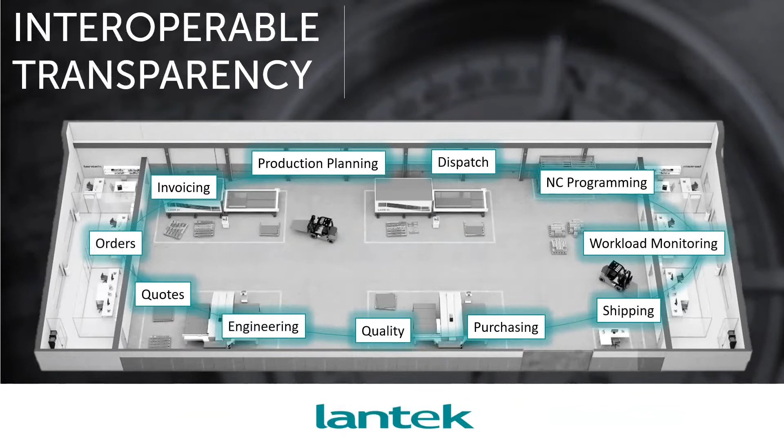All right, so this leads us into our Lantek Expert Punch demo. So we know that tooling a part can be very time consuming. You know what tool you want to use, but the question is, does the software know which tool you'd like? Also, the punch sequencing can be a bit of a burden. So how can we get the direction you want in a less time consuming way? By using Lantek, you can create punch macros to help teach the software what tool or tools you want to use for a specific contour. And you can also make tooling common shapes a lot quicker.

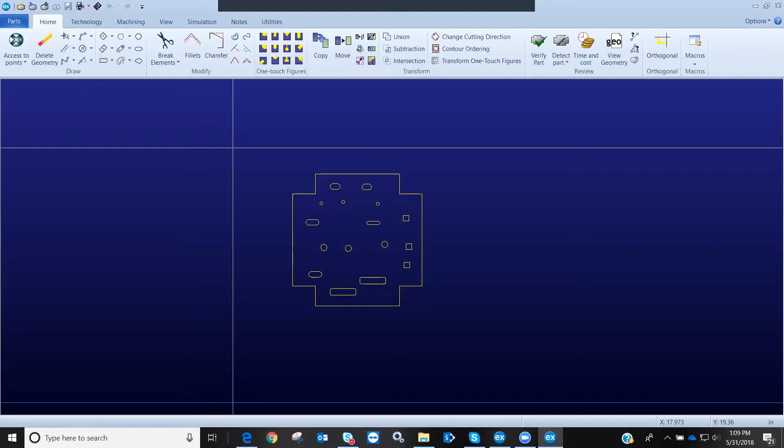And then I'm going to open that in what we call our drawing module, but it's also our machining module as well. So we open up the drawing module, and this would be the geometry we're going to work with for this particular part.

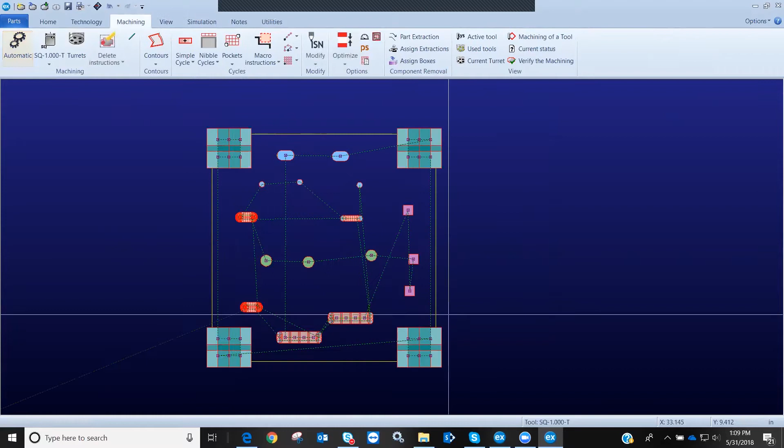So at this point, I'm going to go to the machining tab and click on automatic for automatic machining. Here we have some different options and configuration settings. I'll go through a few of them, but to start with, I'm just going to tell the system that it can use all the punches in our inventory. Select OK.

So we can see that the system can recognize if we have an oblong shape and a tool that matches that, or rounds; it knows to tool those directly. If we have a shape that cannot be done with one punch, the system will try to use multiple punches. You see we're using a round on the radiuses here, and then a square in the middle on this one.

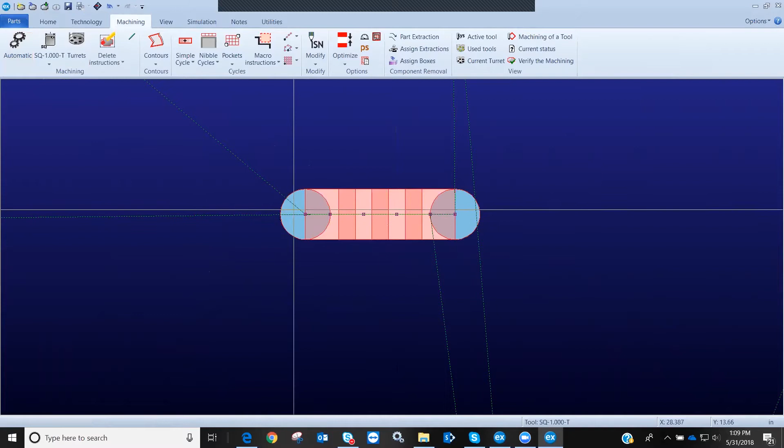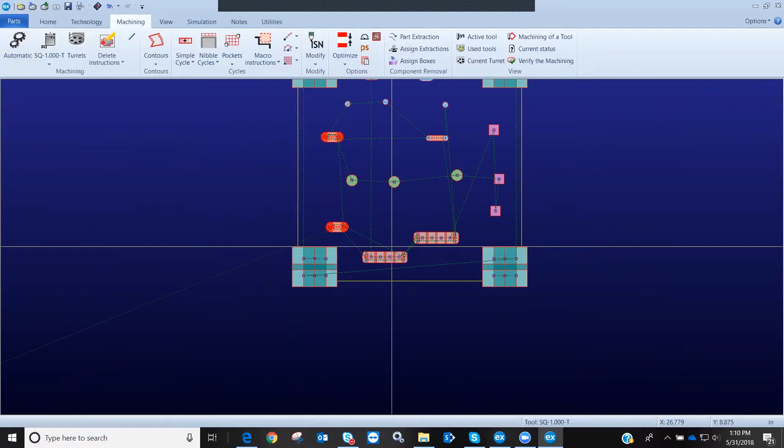On this particular contour, we're nibbling around here and using a square tool in here to finish that out. Down here on this contour, we're using a couple rounds and squares to do this. So the system will kind of do what it can to try and pick a tool. It usually tries to pick the biggest tool it can.

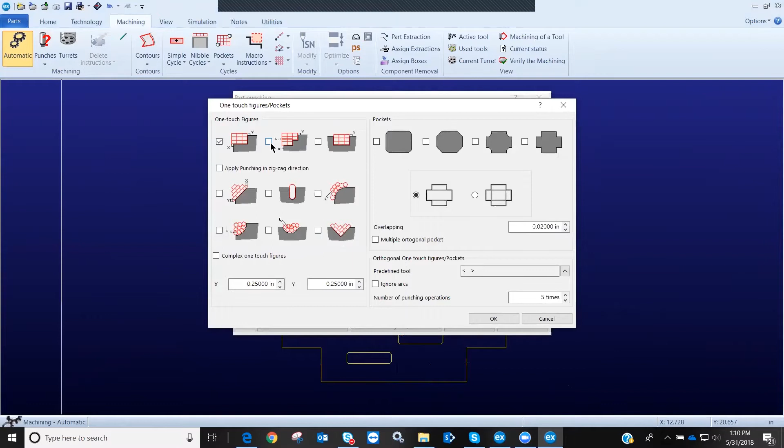And then on the outside corners, you'll notice that it destroyed the corner, and it also went outside the part. The reason it did that is because of an option we have here we call one-touch figures. This just gives you the option to tell the software that you want to destroy a corner. If we don't have this checked, I'll uncheck this.

What it does is it treats each line individually. The idea is the system will try to find the longest tool it has in order to punch that line with that tool. So if we don't want to destroy a corner, we don't have to. We can just let the system treat each line individually.

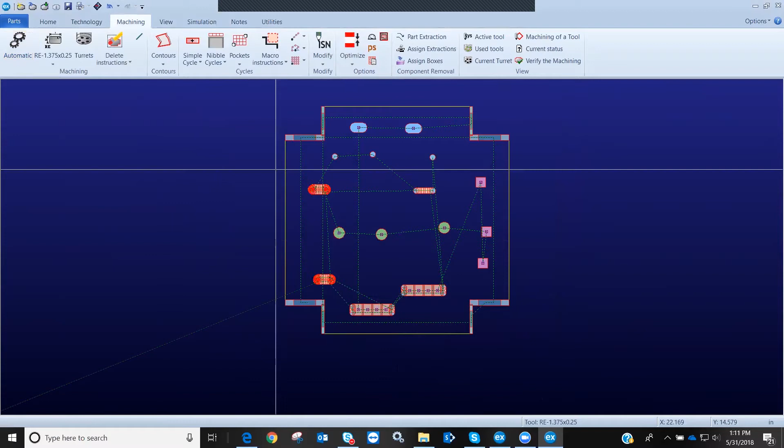So we have those options in the machining settings, and every time you machine, that window can be prompted to come up, and you can choose different options in there.

So before I machine the part or finish machining, the other thing that we can talk about is microjoints. And under our technology tab here, I can apply microjoints to this part. And if we're going to apply microjoints that are going to affect how the tooling is used, then we need to do those first.

So for example, if I wanted to put a micro joint on either side of the square corners here in order to create a kind of a shaker tab, then we have a few different ways to do that. I can do just micro joint on one corner, micro joint on a contour, on 2 corners, on 4 corners, or I can make a whole contour micro joint. But since I know that I want to put it on both sides of this line and both sides of this line, I'm going to choose my micro joint on corners.

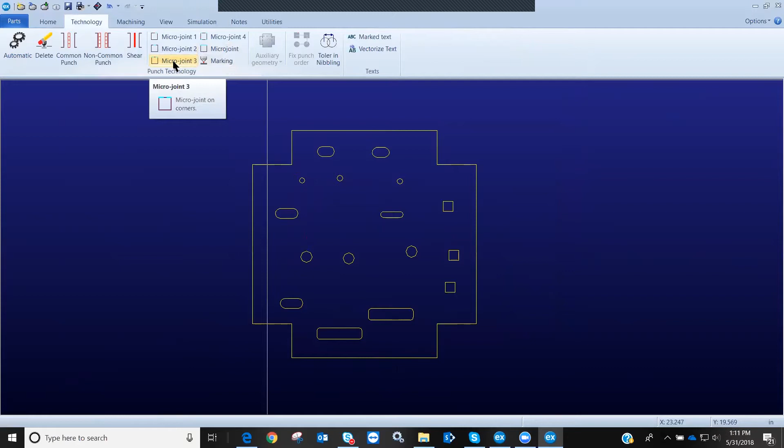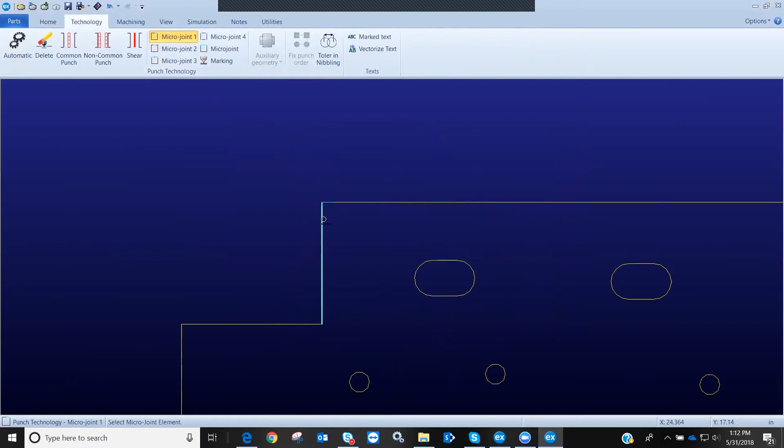I just choose the line, and I'm going to make this a little bigger than what would be normal just so that we can see it. So I select OK, and we can see that the little light blue line is just letting us know, along with the dots there, that it put it on there, and I'm going to choose there. And then if I wanted to put a micro joint just on the end of this line here, I'm going to choose micro joint just on a corner, and whichever side I choose closest to, that's the side it's going to put that on. So I will put one there and there and there and over here.

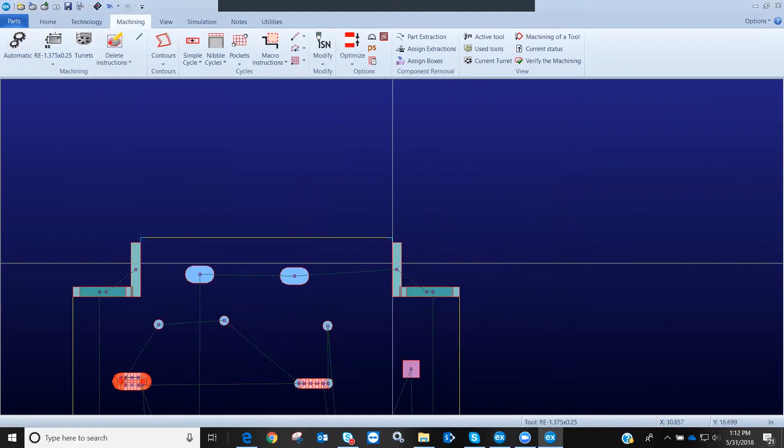Okay. So now when I machine the outside of the part, or machine the part totally, then the system recognizes that there is a micro joint there, so it will stop that punch short so as not to violate the micro joint. Then at this point, we need to decide, when we go to nesting to nest this part, do we want it to be common nested, where we take one particular size punch, and as we go down between 2 parts, it just takes the 1 row of hits, or a non-common?

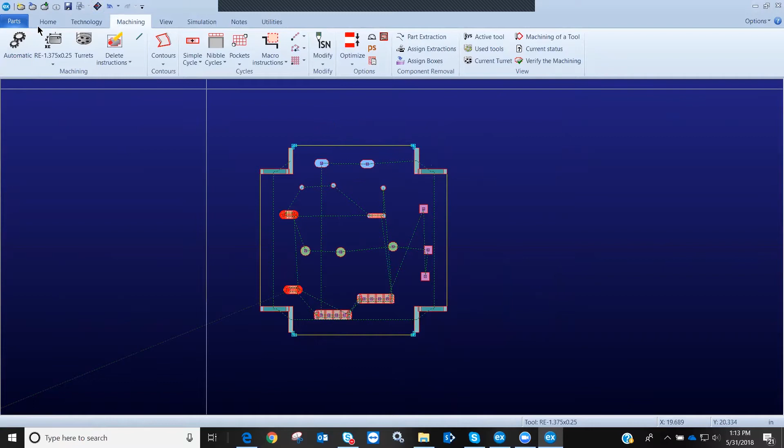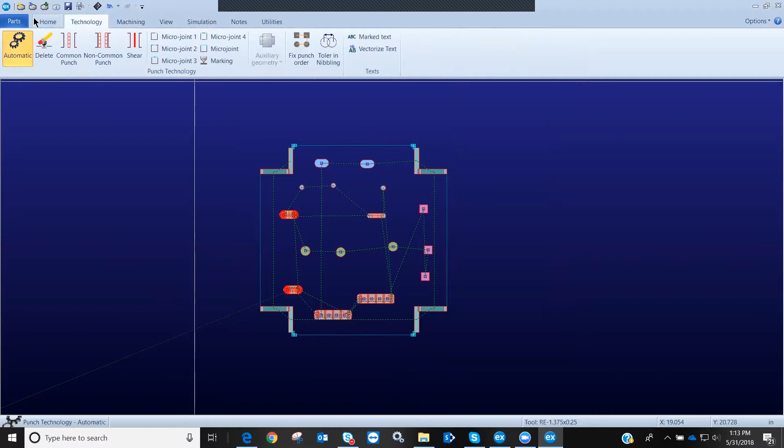So I'm going to go back to technology. I'm going to click on automatic, and I'm going to tell it I want to do a common punch between the number ones, and the number ones are just the true horizontal and true vertical lines of the part. And I'll say OK, and the system just changes those colors. It just lets us know that it has applied that technology. And then I will save the part.

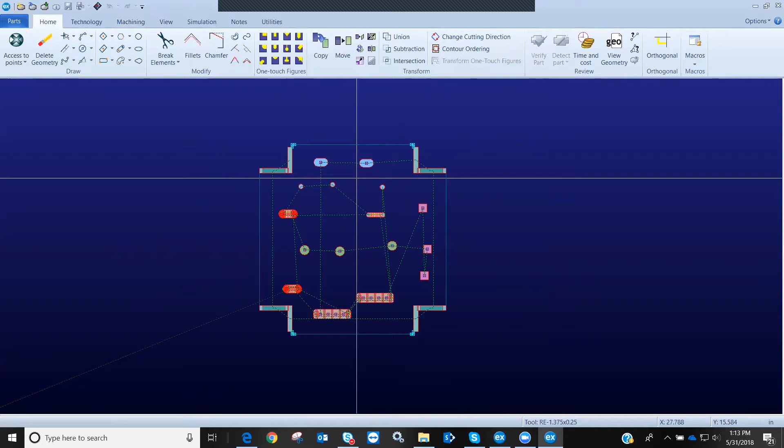Now, I have not punched the very outside of the part. You can at the drawing level, but a lot of times we recommend you wait till you go to nesting to apply those. That way, if you're mixing parts, then you can have a common tool to punch the outside. So I'm going to go ahead and click on our nesting module, and I'm going to change my quantity here, a few parts, and I'll do a 1 sheet nest on a 4x4 sheet.

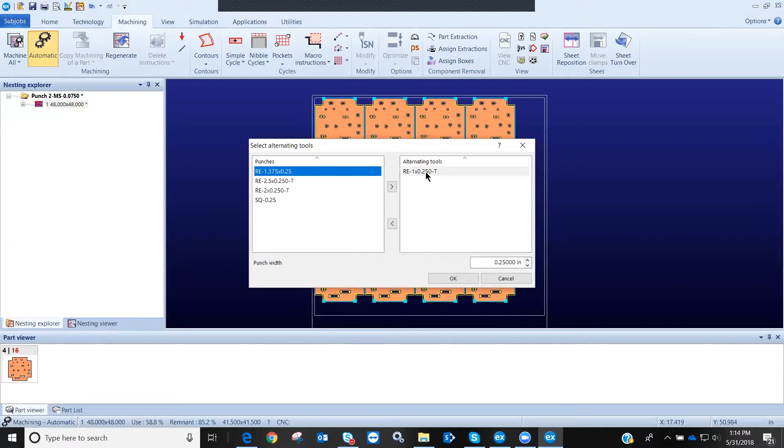So at this point, it's done the nesting, and the part has already been machined at the part level. But what we do now is we machine it here, and it keeps what we did at the part level, and now we're adding the outside tool. So I have a horizontal tool for the outside. This is just letting me choose an alternate tool. So if the system can't use the main tool, it has some alternate tools, maybe shorter tools that it could use for the horizontal, and then same for the vertical.

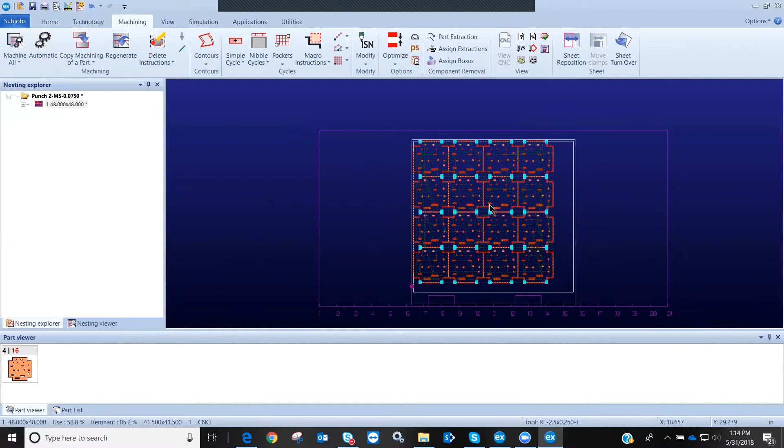And then when it gets to the end, this just shows you your turret layout, what tool is in each station, and whether that particular station is being used or not. And I can select OK, and you can see that the system has gone in and tooled all the part. It's added the outside punching. Up here where the micro joints are, it honored those micro joints. And through settings in the software, we're going to wait to do the outside hits last.

If we wanted to change some order in regard to the tools, if we wanted to put the tools in order manually, for example, by default, the system is going to go normally from the smallest tool to the biggest. You can also set it up to do it by turret station. So if you just wanted to start with station 1 and go around the turret, you could have it do that as well.

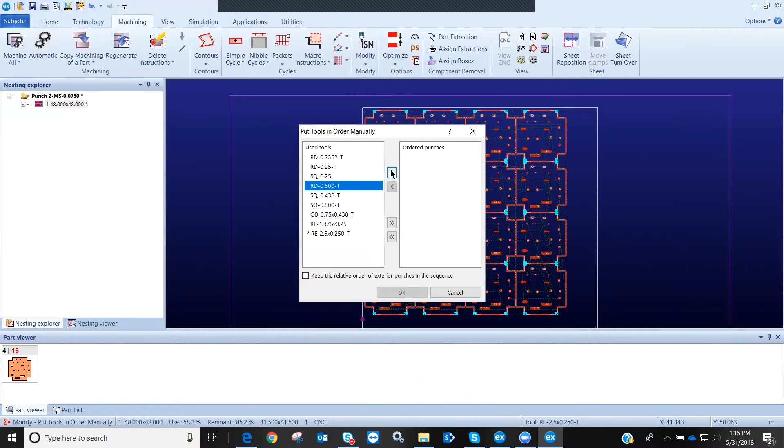But if you wanted to change some order that it is doing the hits in, I can choose manually the order that I want to do it in up to whatever point. And then after that, if I just want to take the rest that's there, I can move everything else over, just say OK, and the system will just automatically go in and redo that. And as far as the outside hits go, the way I have it set up right now is it's going to do the vertical hits of the outside and then do the horizontal last. So I'll just very quickly in the simulation, just going to back up a little bit here.

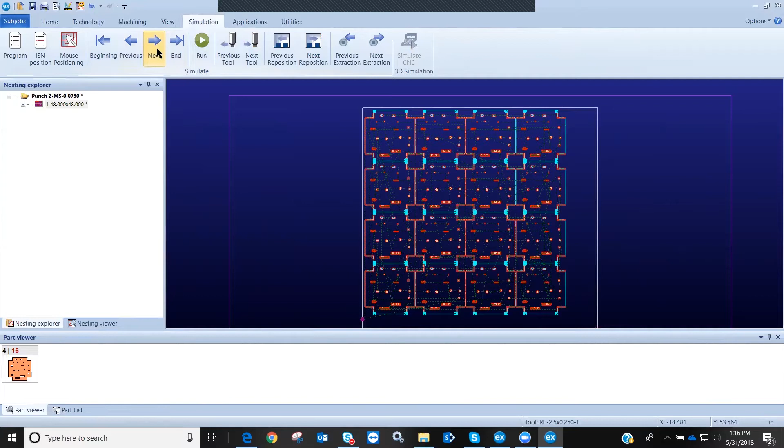So you can see right here, it's going to start doing the vertical hit on the outside. All the inside hits are done, and it's going to come down this way and then go back up and around. And then when it gets done down here at the bottom over here, it will go back to the top and then go from the top down and work itself toward the clamps.

So there are configuration settings that are telling the system to do this. Those can be changed with different options we have, but that's kind of the most basic. You'll also see down here where you can see the clamps, and if you have a machine that has different clamp zones depending on the station size, as you simulate the punching here, the clamp zones will change to show whether you're close to a particular tool or not.

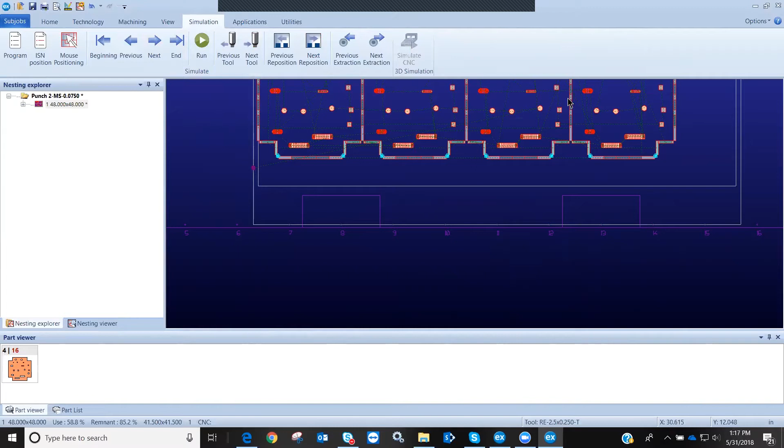The system will also do automatic repositioning. If you do want to nest down in the clamp zones, it will try to reposition to do the part as best as it can, but you also have the ability to do manual repositioning if you want to as well. So that's kind of a quick A to Z: you bring in geometry of a part, you tool it, you go to nesting, you finish the machining there with the outside, and you get your nest and you save it. So I'm going to go bring in another part here.

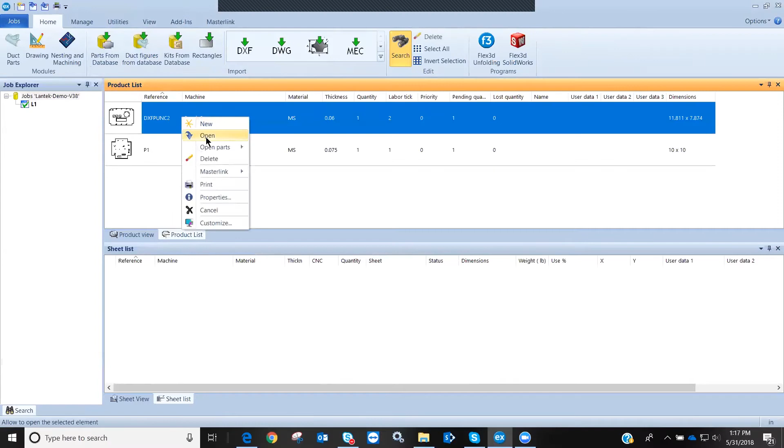This particular part has some different shape geometry on it. You'll see we have this particular shape here. It's not a standard shape, so we couldn't just create this by going to manage tools. So we're going to have to create this shape from the geometry. And I'll show you first of all, if we just tool this the way it is, the system will try and tool it, but if you purchase a tool to do this hit, it won't use that tool until we've created it.

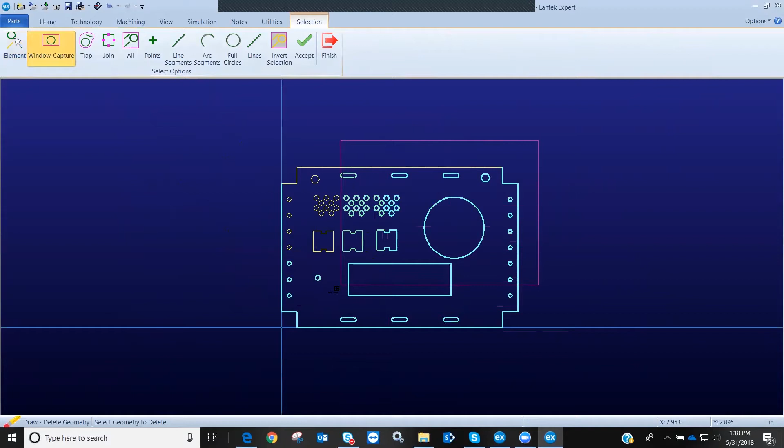So to create a special tool, I only want the geometry that makes up that tool. So in this particular case, I'm going to delete everything else. Now, if you get a special tool from a tool manufacturer, normally they'll send you a DXF file of that tool, and you can just import that DXF file right into Lantek, and we just need the part geometry, or you can draw it inside of Lantek as well. So I've got my part geometry here.

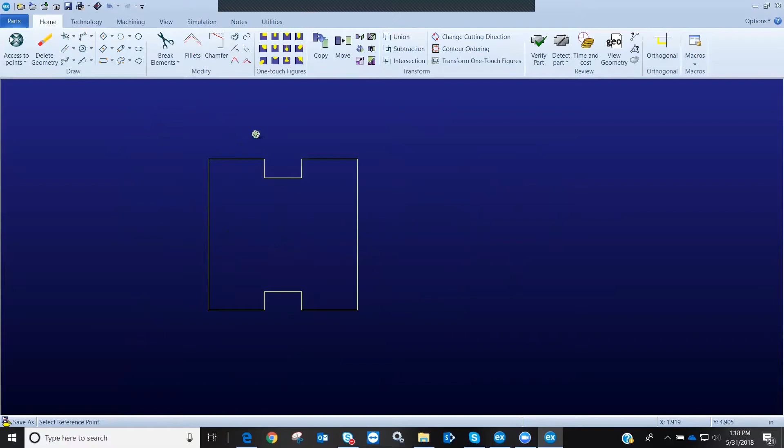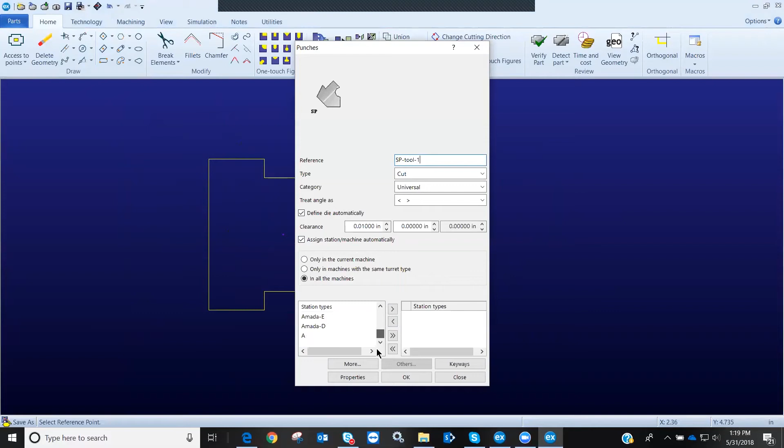I'm just going to go to the parts tab here and form tools, save as, and then I'm going to choose the center of our contour. The center point is going to represent where the center point of the tool would be. So again, normally when you order a tool, you're going to know that, or you'll get it with the drawing of the tool. So I'm going to choose the center and just give this a name. You can call it whatever you want, whether it's a cut or form type, whether you want the die clearance, and the station type that it's going to be in. And it has created that form tool.

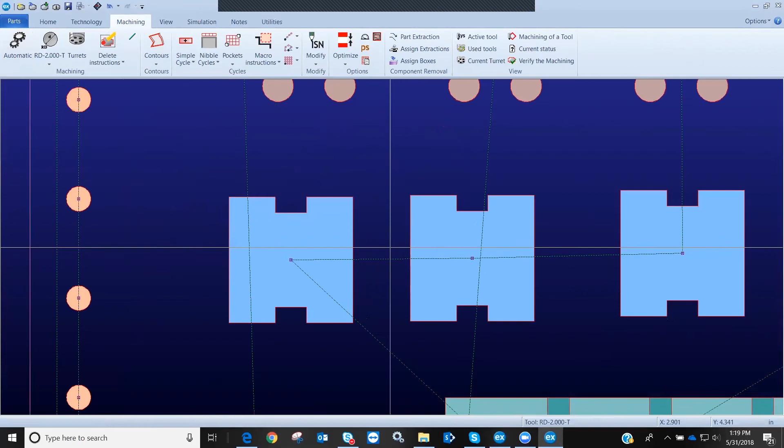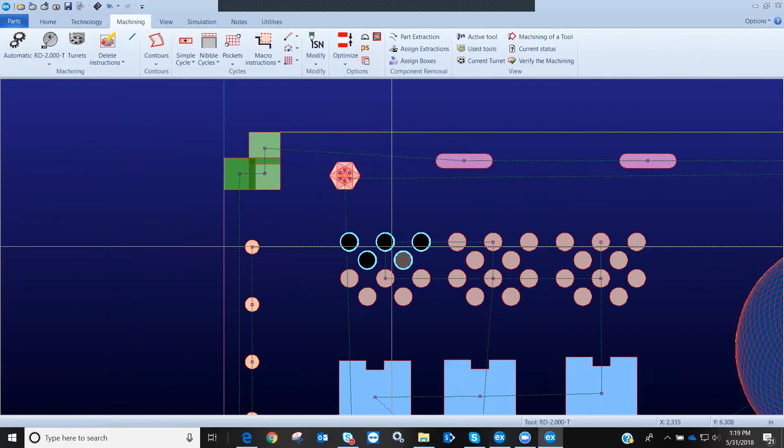So now I'm going to reopen our part that has that particular geometry in there. And now when I automatically machine this, the system recognizes that it has a tool for that geometry, and it will go ahead and automatically use that tool. Now you'll notice in our group of hits here, I have already created a gang type tool, where this particular tool will make 5 hits with the one tool. And this got created just the same way as the special shape down here.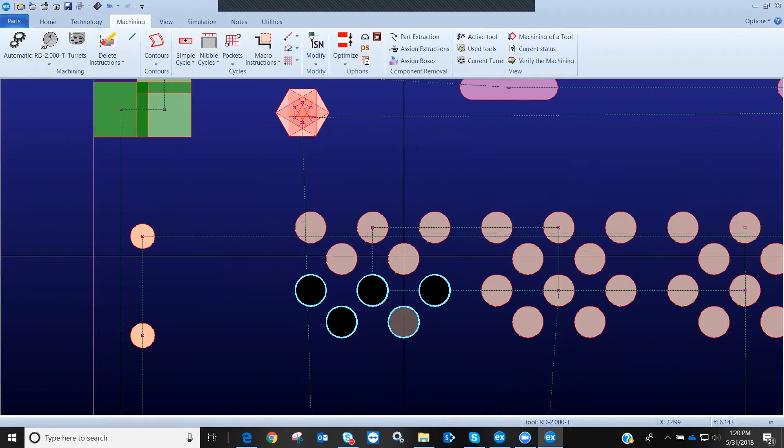We just had the geometry of the 5 holes, and we created it as a special tool and gave it the center point reference. And then when you have a part that has that same group of hits with the exact same spacing, the system will recognize that, and it will use that gang punch to punch those holes. So if I right click on this, you can see that it's selecting that particular tool. And then we also have a big round here that it's doing some nibbling on, and a big cutout here that it's done some punches on.

But what if the system didn't do something I like, or I don't like the way it punched something, or I just want to change what it did? We have some ways to do some manual punching. So I'm just going to delete what we have here. And so for example, on this circle, if I wanted to maybe punch the middle of the circle out with a square tool and then do the outside with a round tool, I have the option of doing that in our macro instructions here.

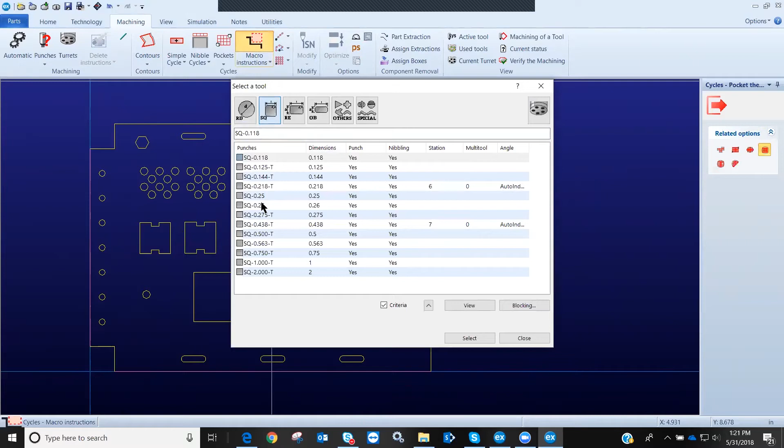I can tell the system to pocket the square of an inscribed circle. And when I choose this, it's going to tell me that I have no active tool yet. So I just need to choose the square tool that I want to use to do this with. So I'll choose this 275 square. Now, as I move over near the circle, as soon as I get near that circle, the system will recognize that it is a circle, and it will go ahead and add the group of hits for that square tool.

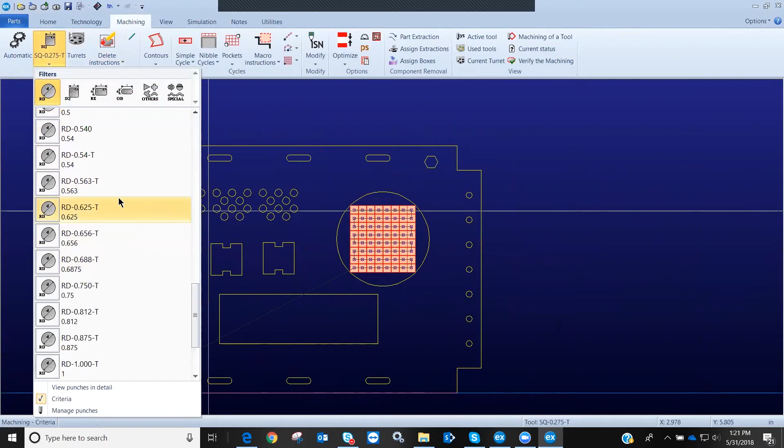Now, over here, I can choose a round tool that I want to use to do the outside or finish the circle. I'll click on my 625 round here, and I'll go now to our nibble cycles and choose by geometry. And what this is doing is just as soon as I get near a geometry, depending on whether I'm on the inside or outside, it will tool that geometry with that tool. So as I get there, I just select that, and it's now done the square hits and the round hits.

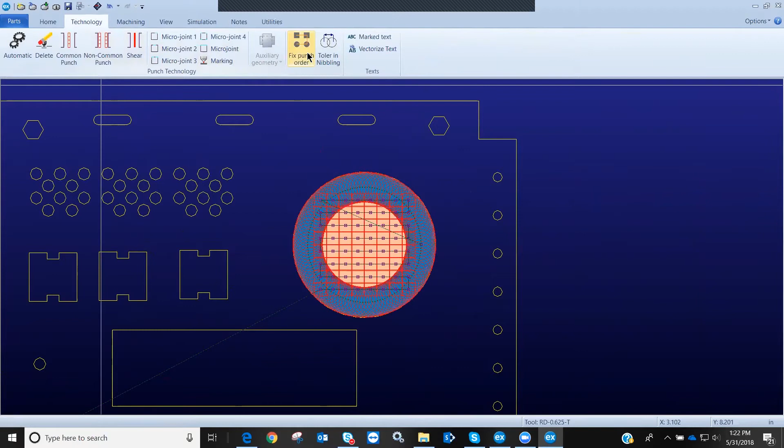Now, at this point, we want to make sure that if it's going to use that combination of tools, that maybe it always does the square tool first, then the round. When we go to nesting and nest it, we could choose the sequencing there, or under our technology tab here, under fix punch order, we can tell the system, I want to do the square first, then the round. And when I select OK, for this part, when we save this part, every time we bring this part into nesting and nest it, it's going to keep that sequence of those two tools for us automatically.

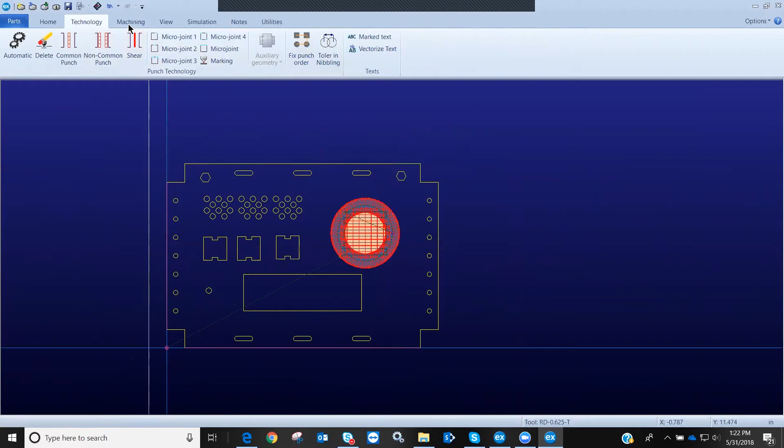And then for our rectangle down here, if we want, instead of destroying this rectangle, maybe we want to punch this with a rectangle tool around and leave some tabs in it, we can do that as well. Through our Macro Instructions tab here, we have the ability to do a rectangular hole with micro joints on 2 sides or 4 sides, or we can do one where we actually have to put in a stop or trap. We'll just choose maybe 2 micro joints here.

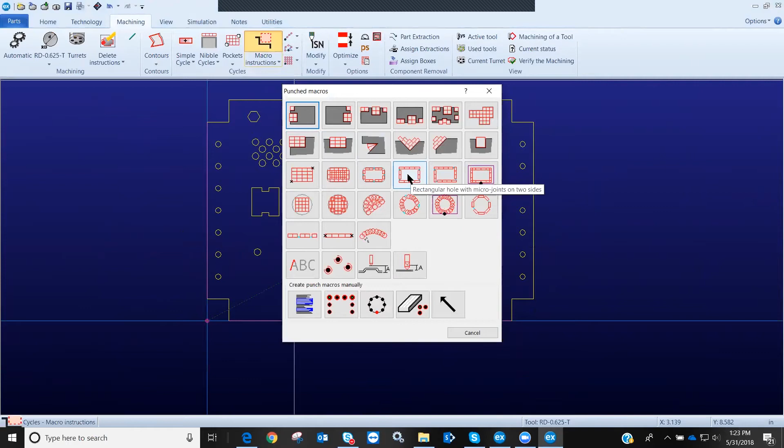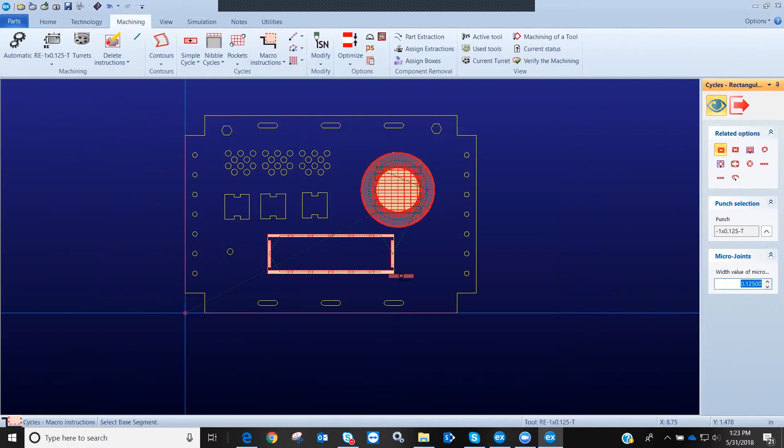Now I haven't chosen a tool yet, so when I click on this, it's going to tell me that I need to choose the rectangle tool that I want to use. I'll choose a 1/8 inch here. And now as I get near that particular cutout, it will choose that tool. And over here on the right side, I can put in the width of the micro joint. So I'm going to make this bigger just so that we can see it. So I select that, and now you can see it's added the micro joints along with the hits to cut that out.

And then after we do whatever manual machining we want to do, we can finish with automatic machining. And you'll notice on the corners again, we didn't have it set up to destroy the corner, so it just punched the edges with the biggest tool that it found. If we wanted it to destroy those, I don't want to delete all the machining. So we have undo buttons here. So I just did an undo of what I had just done, and I could go back to the one-touch figures. I can choose to destroy the corner if I want, and the system will destroy the corners.

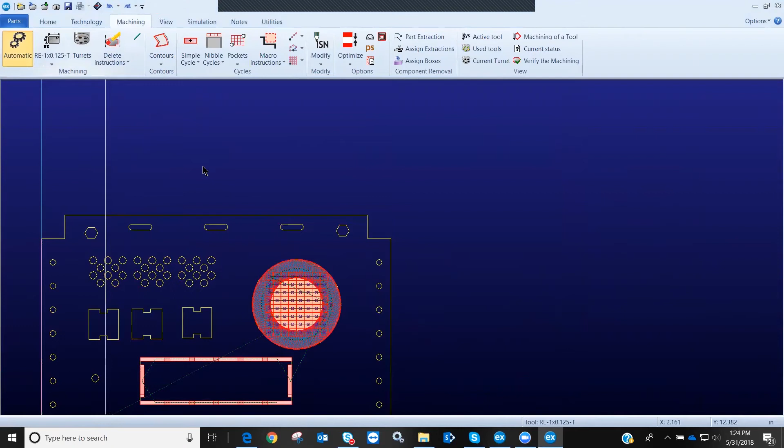Now the reason it's overlapping here is because I have a setting here in our one-touch figures. I'm telling it to by a 1/4 inch. That 1/4 inch just matches the width of my parting tool. But if you put 0 in there, then it won't overlap at all. So you can see it's staying to the edge. So just some parameters that kind of help the system know exactly what it is that you're wanting to do with the part.

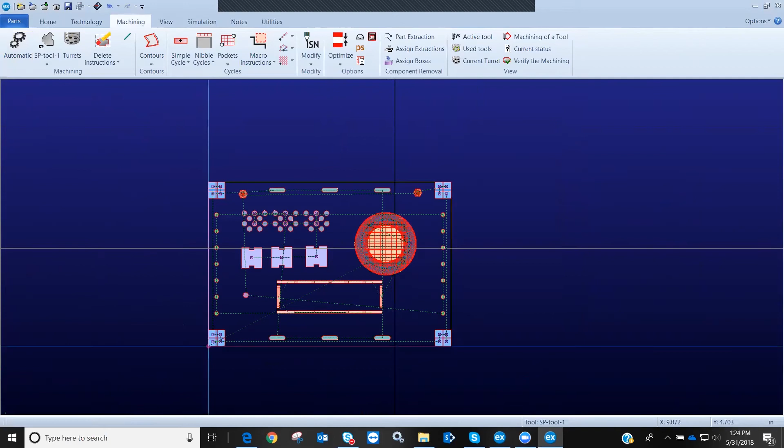Okay, now let's say that you have a part where some contours or parts of contours are consistent through a bunch of the family of parts, and you want to tool those a certain way, and every time you have that part, you want to tool that contour a certain way. You can do that by creating a macro in Lantek.

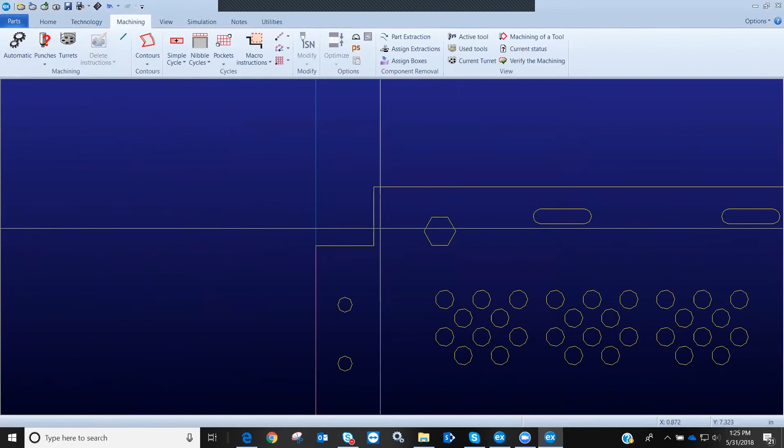So for example, if this particular part is one of a bunch that has the exact same corner notch on it, and you want to tool this up a certain way, we can do that and create a macro from that. So similar to creating a special tool, I only need the geometry that I want to make up that macro. So I will get rid of everything else. So I'm left with just what would represent that corner notch.

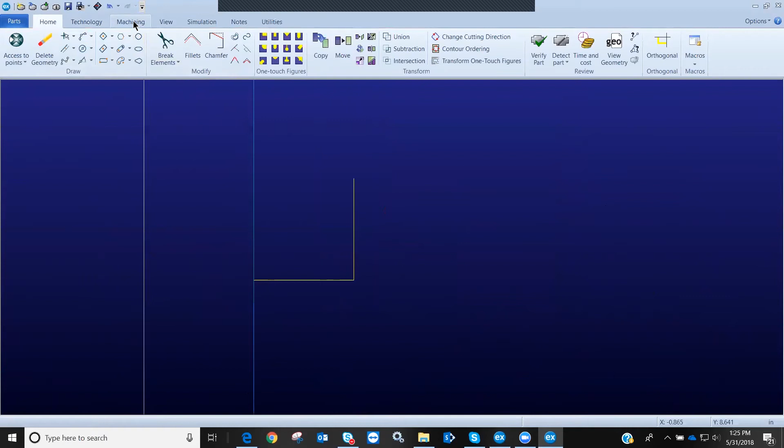So I'm just going to go to machining and select a punch. We'll just do 275 square here. I'm going to use my manual options to tool this. I know this wouldn't be the perfect way to do it, but just an idea. So I've tooled this the way I want. I can use different tools. It doesn't have to be the same tool.

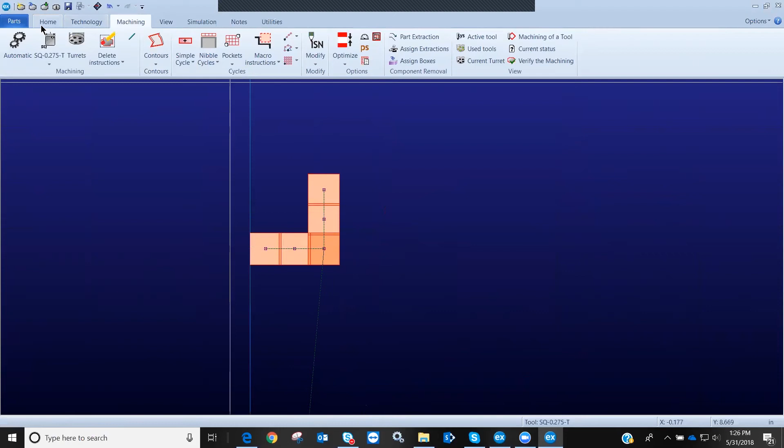And then I'm going to go to my parts tab, go to machining macros, save as, and just select a reference point. This is just some point on the line there, and call this whatever we want. Okay.

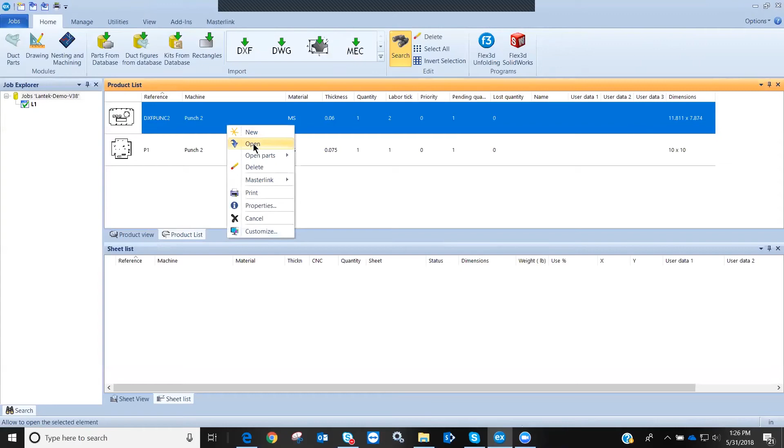So now when we go back to our part, if this would be a family of parts, then when I click on automatic, select OK, you see that it uses that same tool automatically on this part. So any part we bring in that has corner notches of this exact same size, it will use those hits. So it just kind of helps you tell the system how you want to tool a particular piece of geometry.

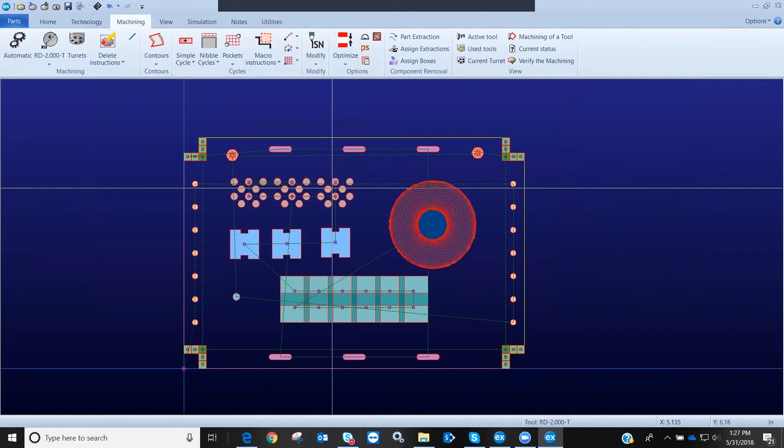And it can be for corner notches, it could even be for internal contours. We especially use it when you're doing form tools, which I'll show you a little bit later. So that's an idea of how to kind of do some manual stuff. Let me close this one. We'll bring in a different part here. This one is a little bit more complicated.

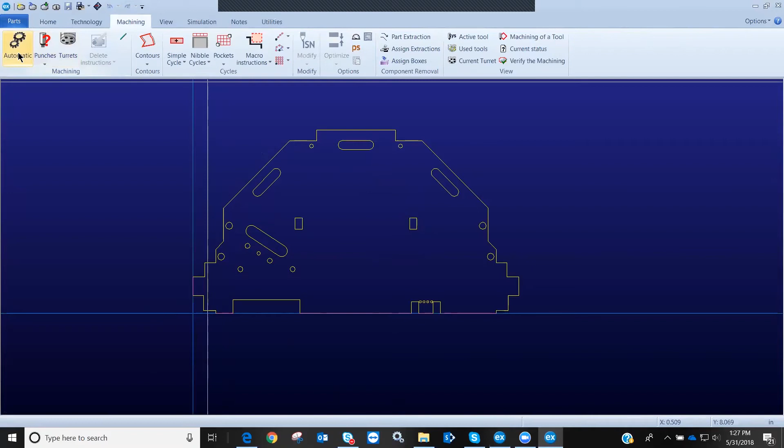Maybe more of a laser part than a punch part, but just to give you an idea, when we click on machining and machine this, I'm going to turn off those. What the system's doing is, again, it's just trying to find the biggest tool that it can, or if it finds a tool that matches, it will do that tool. And then on the outside, again, it's just trying to find the biggest tool that it can to tool each line individually.

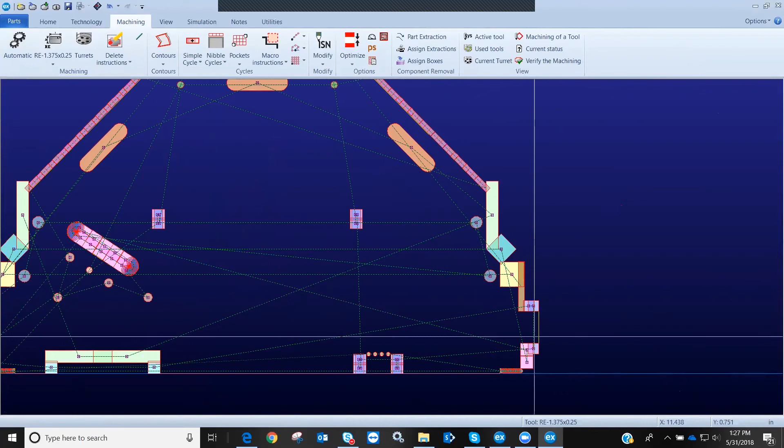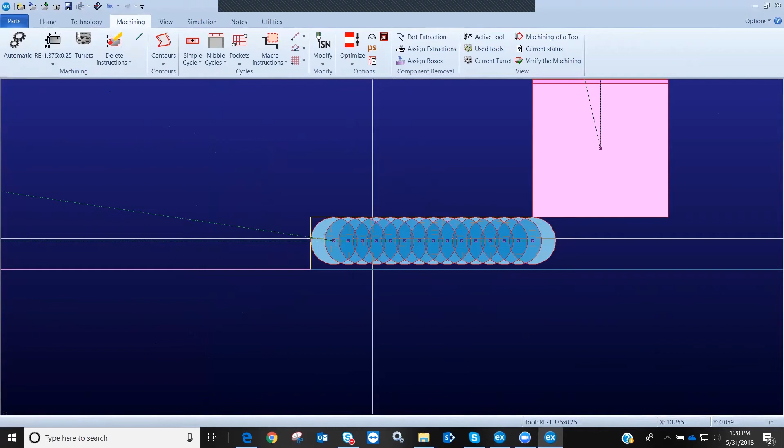And sometimes you'll get something like this where it doesn't have a tool that will fit this, so it'll go down. It basically starts with the rectangle to a square down to a round, and in this case it just used a round to nibble that line. It's not the best scenario, but it's at least trying to punch this. And since I told it that it couldn't punch outside the part, that's why it's doing this.

Well, what if I want to allow it to punch outside the part a little bit to help the system tool this part? When I click on automatic machining here, we have some offset values, and these will tell the system whether, when it's punching a part, it can go beyond the limit of the part or not. So I can put in a value in here. The maximum offset means it can go up to 1/4 inch, so it doesn't have to go a full 1/4 inch outside of the part, just up to that value.

The outside punching offset, if I put a value in here, then I'm telling the system that I want it to go that much beyond the part, and it has to go that distance. So it would hit however many times it needed to go beyond the part that particular distance.

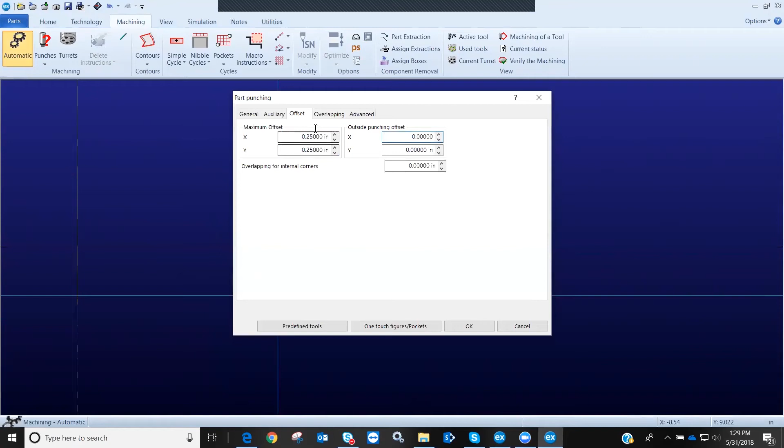So if I say okay, now you can see that instead of using that round, it found a rectangle that it could use there, and it's within that 1/4 inch limit that it's allowed to go outside of the part. So it did change the tools that it used to punch that, just based on that particular setting.

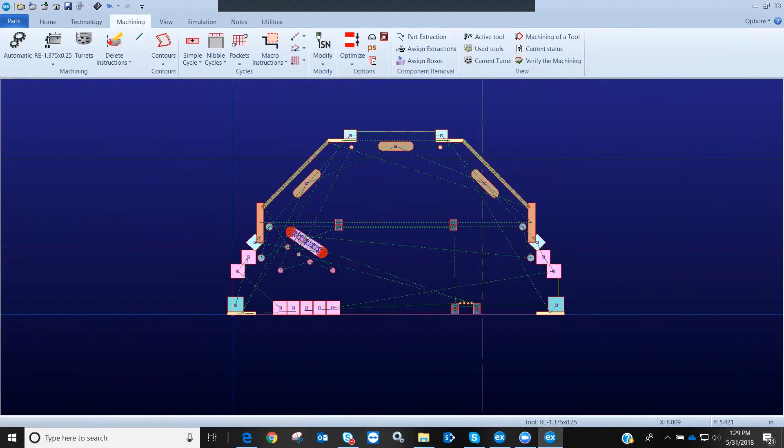Now let's say that we want to choose a specific tool maybe to do these incline punches here. It's not using the tool we want. A couple ways to do it. I could say I want to delete machining by selection, and I'm just going to select that particular set of tools. And then I can go to our tool list here, and I can choose a tool that I want to use.

And then, for example, if I want to do just a nibble cycle based on geometry, as I come over here near this particular line, the system will automatically align the tool at the angle needed, and it will apply the hits to that line. So I can quickly change it that way. But maybe there's a tool that I want the system to use. Every time there's an incline line on a part, I want it to use a particular tool.

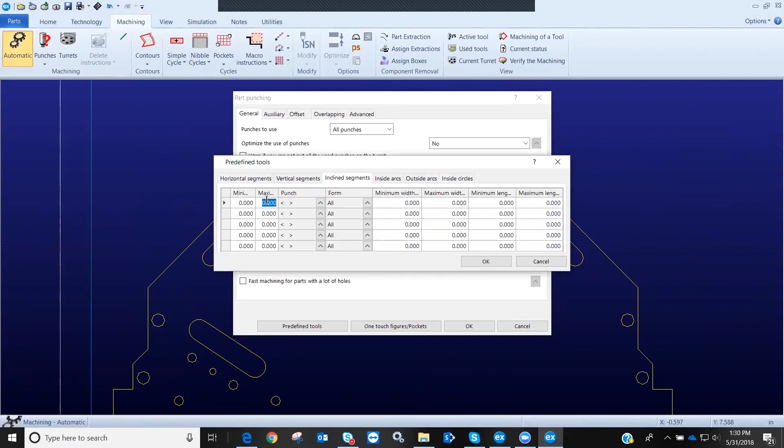We have what we call predefined tools, and this gives you the ability to, for horizontal, vertical segments, incline segments, inside arcs, outside arcs, inside circles, you can kind of teach the software, or try and teach the software what tool you want it to use when it encounters a particular line segment. So for example, I'm just going to say, well, for this incline line from 0 inches up to, I'll say 5 inches, I want it to use a particular size punch. Maybe the 1 3/8 by 1/4, and I'll select OK, and OK, and OK.

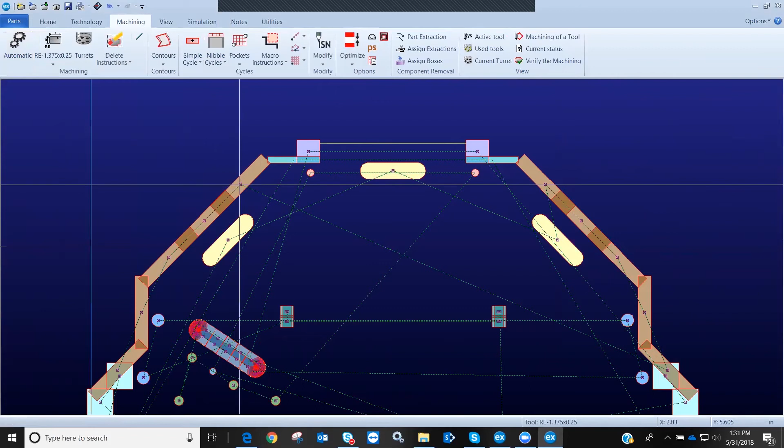So now if I right click on any tool and go to properties, it will tell me what punch is being used, and it will also let me know the XY coordinates of the tool. Just give me some information about what it's doing there. So by using predefined tools, we can also try and teach the software what we're wanting to do. So macros would be one way. Predefined tools is another way that we can use to kind of teach the software what we're wanting to do.

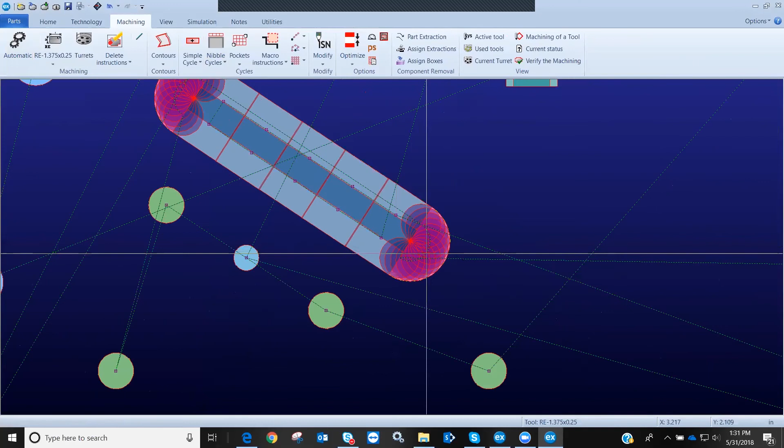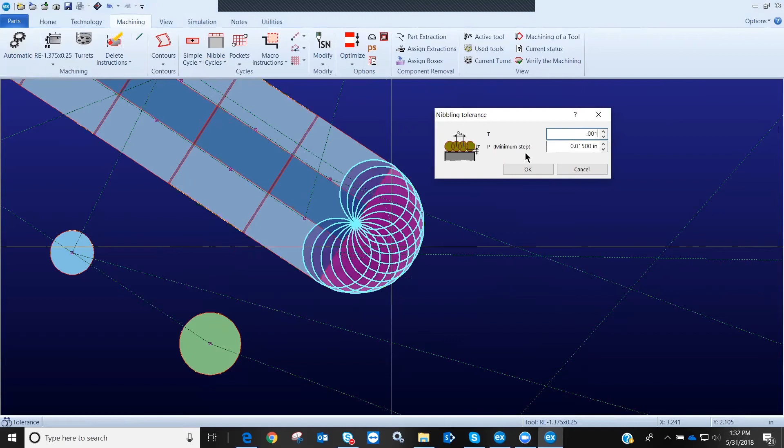Some other options we have after we have tooled a part: I showed you we can right click and go to properties to get some information about the tool. We can also right click on a group of tools here, and I can tell the system whether I want to shorten this particular hit by a value, lengthen it, or go to a certain point. If it's a nibble like this is, I can change strokes and go to tolerance. So if I wanted to make that scallop a little bit smaller, I can change my T value here, and you'll notice it's adding some more hits in there. So I've just kind of tightened that up a little bit.

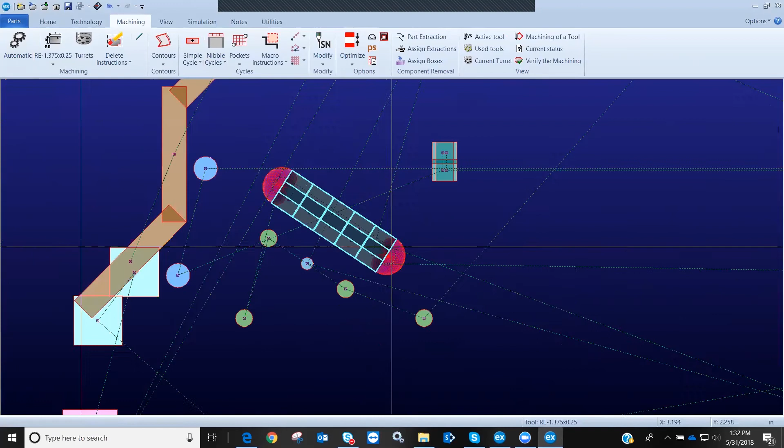You can do the same thing in here. I can tell it to shorten or lengthen this by a value if it's a rectangle or something like that. So any group of hits here you can right click on, and there's some options in here that you can do to change what the system has chosen. So even complicated parts, the system does a pretty good job of trying to find the tools. And again, it's just going to try and find the longest tool it can to tool a part.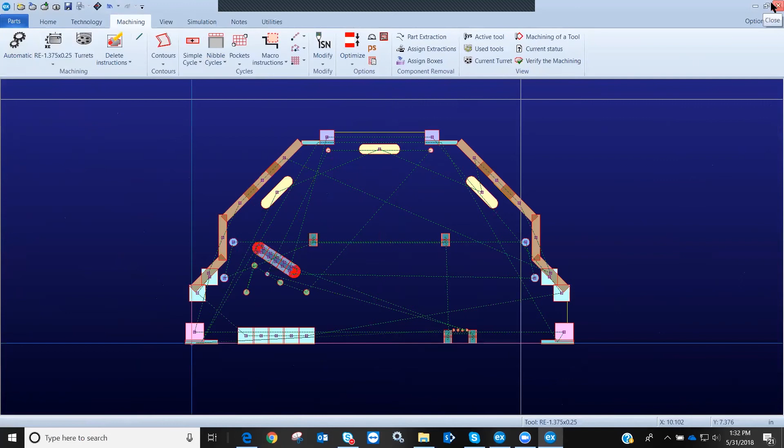All right. So let's see. We'll bring in another part here with just some different scenarios in it. This particular part actually has a form tool in it, and I have this particular geometry just representing that form tool. In our system, you can create a special tool and make it a form tool, but the geometry needs to be connected geometry. So you really can't just take a bunch of crossing lines and say, okay, create a special tool from that. It needs to be closed geometry. So something like this or that other one I created the special tool from. In this case, I already have this created, but I'm going to go ahead and machine this.

The scenario I'm going to show you is, if this were a form tool here, and we go to nesting and use a rectangular tool to cut along the top side, if we do that rectangular tool after we've done the form, then we run the risk, because these are so close to the edge, of mashing those forms back down. So we want to sequence this so that it will do the forms before it does the punch on the outside. If the outside punch were a completely different punch on this side than for the other three, that wouldn't be too difficult. We could just use our order punches manually. But in this case, it's going to punch with the same punch all the way around. So we need to tell the system to do the two sides, do the top, then do the form, and then come back and do the bottom.

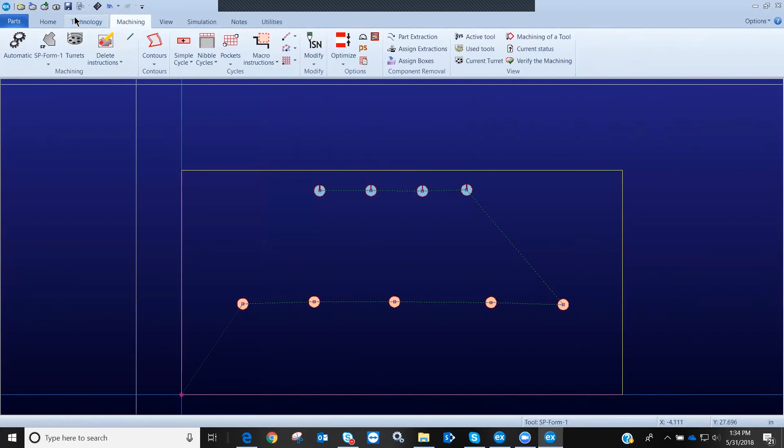So I'm going to go ahead and finish adding my technology here. So I've got the punching, got the technology. I'm going to save it. Okay. And I'm just going to manually throw this on a sheet. Okay. And we will machine this like we normally would.

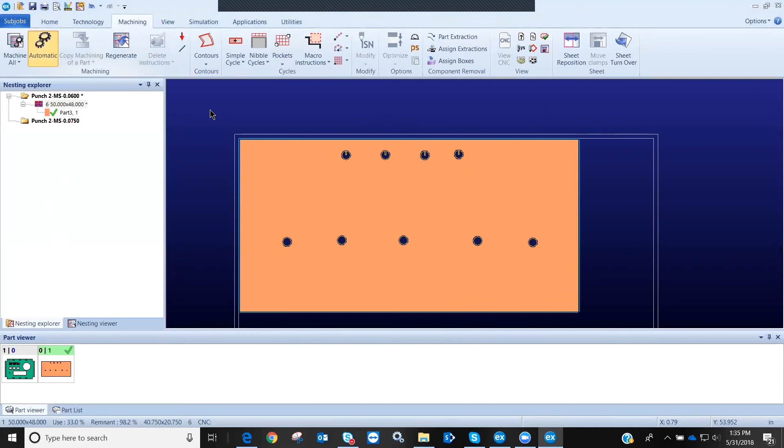Okay. So now this particular sequence, I haven't changed anything. So you'll notice it's going to punch that form, and then it's going to wind up coming back. And it's possible that it could mash those back down. Well, we have an application that we can run, avoid collisions with forming operations. I'm just going to click on that button.

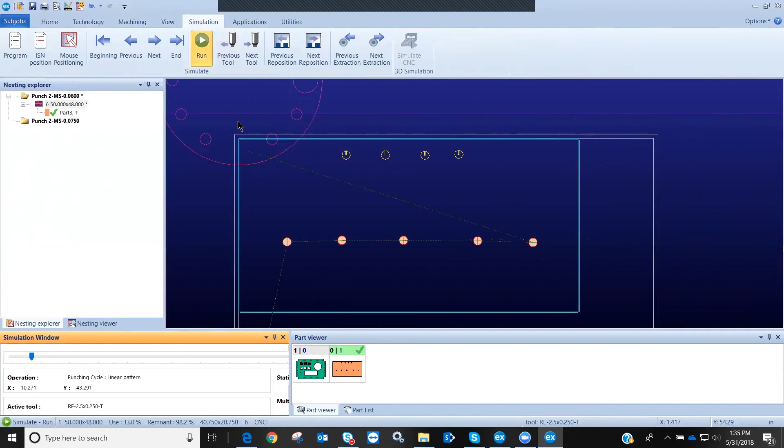Now there are some configuration parameters in the background that you can put in. How far away does it need to be from a punch before you have to make a change, that kind of thing. But now I'm going to run the simulation, and the system will then come in, and it does the outside here, comes in and does the form, and then it'll come back and do the rest of the outside. So the system knows by looking at this that this is a form tool.

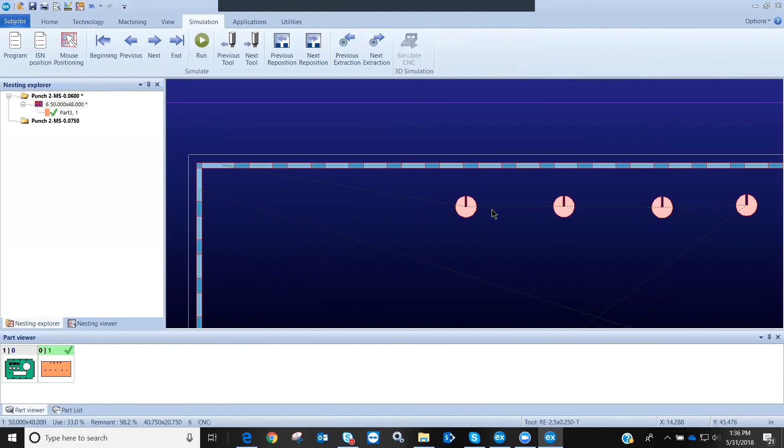When I created it, I told it was a form tool, and we have some options that when it encounters that, if you have another punch close to it and you run that application, it will try and separate those hits for you.

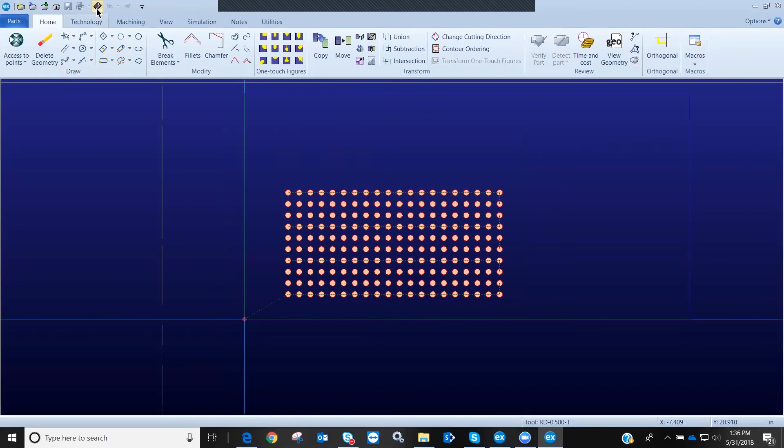Another part I have is just another little scenario showing how to kind of resequence things. So this part here, I already have this one tooled. This is just a group of a bunch of hits here. And I'm going to go into nesting with this. And again, I'm just going to do it on a sheet here. So I'm going to finish machining this.

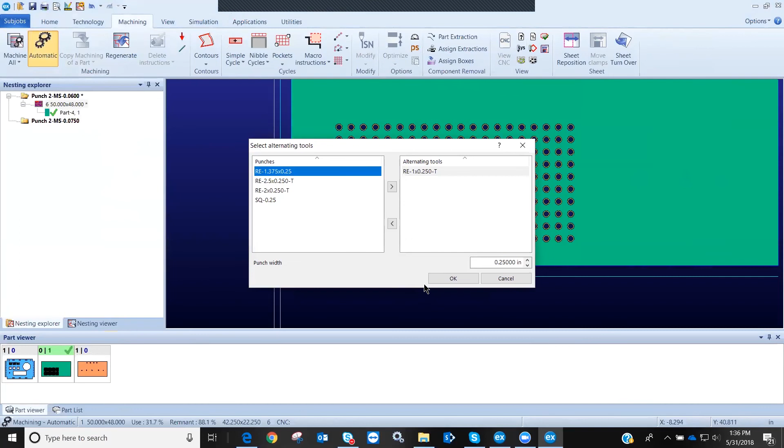Okay. So by default, what the system is set to do is to start with the closest hit from the front point. And right now we've got it going up and across like this to do the hits. It's just finding the next closest punch. So it may not do that sequence exactly the way you want. Maybe you want to start down here on the left and go this way with it. Or maybe you want to punch across, rapid back, punch across, rapid back. So how do we get the system to sequence this the way we want?

After we've done the machining here, we can go to machining, modify. And in modify, I have options in here to do different things. I can reverse the structure of the punch. I can increase strokes, decrease strokes. I can modify my nibble cycles, quite a few things.

But in this particular case, I want to go to order machining, order punch sequence by window for the selected tool. And I'm going to select the round. And I'm going to put a window around all of those hits. And then our order mode option comes up. So if I want to start, for example, in the bottom left and have it go over and up, I click on this one.

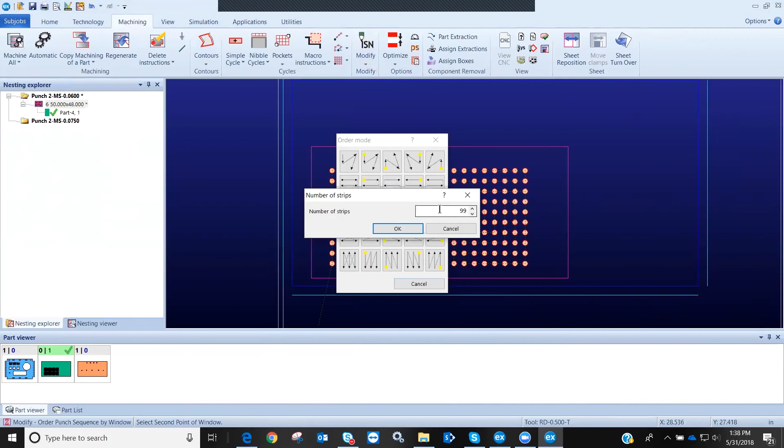This number of strips, it just breaks the sequence down into very small strips so that as it's going across, it's not looking very far away for the next hit. The lower that number, the farther away it will look to find a hit that's within that realm. So in this case, I'm going to start here and it's going to go across and back up. Maybe I want to go across and then wrap it back.

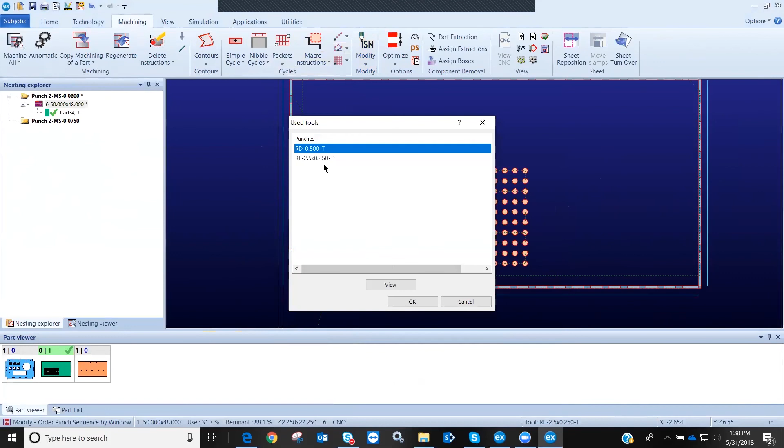So another option we have was in that same order machining window. Put a window around it. This one here, showing the dotted line, that's showing me that it's going to punch in this direction, wrap it back, and punch across. So I can choose that, say okay. Now when I simulate, you see it's going to wrap it over and come back.

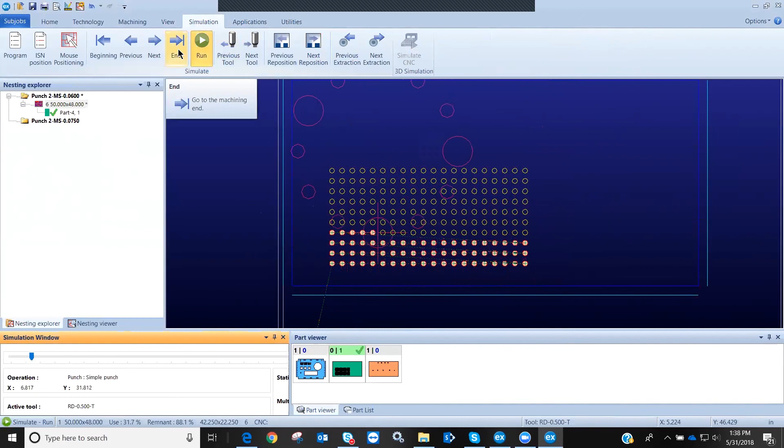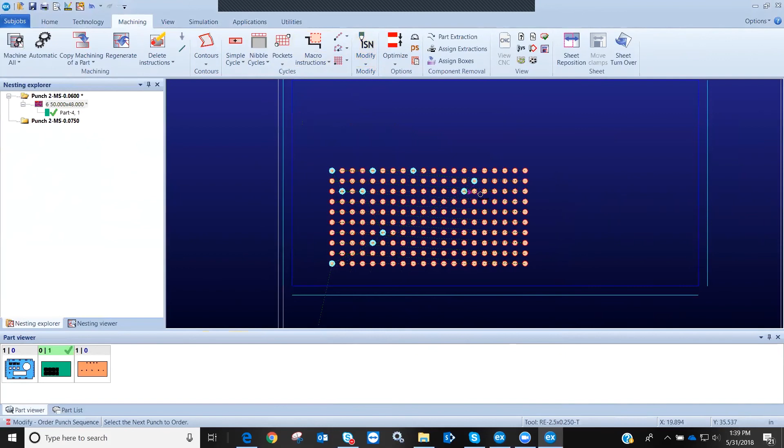So in that order machining window are different ways to get it to do it pretty much automatically. We can also, if you want, order the punch sequence completely manually. If I want to come in here and choose, I want to go from that hit to that hit to that hit, all the way around. So you can also do things very manual as well as automatic. It kind of depends on how you want to do them.